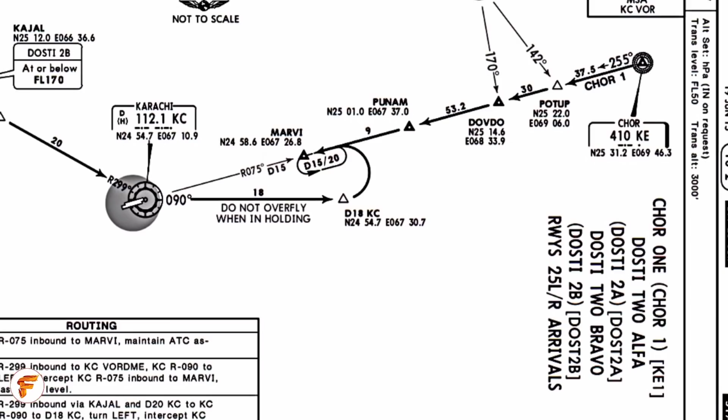This is me, Captain Fahad, and I'm back with the ever awaited series of preliminary report of PK-8303 Part 2.

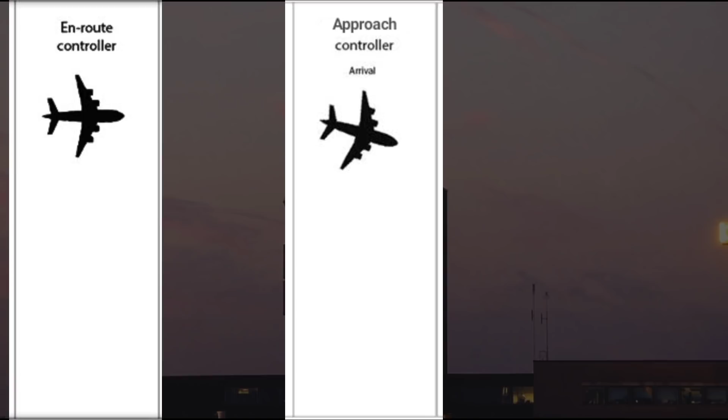Okay, guys, first of all, let me give you a slight insight about ATC controllers. There are three main types of ATC controllers. One is en route or the area controller, second is the approach controller, and the third is a tower or aerodrome controller. So, as the airplane approaches and flies through a center's airspace, an en route controller guides the plane along its route by using radar and computer technology.

They can track the exact position of each aircraft flying in that airspace and adjust the flight path of aircraft to avoid collisions and for safety in general. And once the aircraft reaches the vertical limit of the jurisdiction of approach, it is then handed over to the next control unit, that is an approach controller.

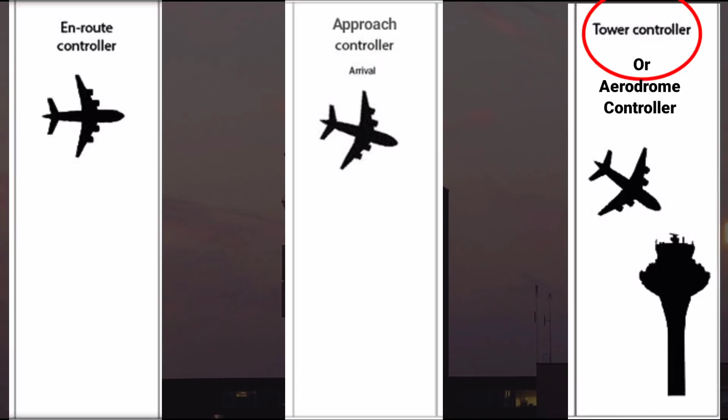Approach controller will further descend the aircraft, and at the same time it will guide the aircraft to align with the runway center line. They are responsible for when and where each aircraft should be, ensuring that the minimum separation is maintained between aircraft coming for an approach. Once the aircraft has descended sufficiently and is aligned with the runway center line, its control is then passed to the destination aerodrome tower controller, which then clears the aircraft for landing if the runway is clear.

One thing more on this is that aerodrome controllers are located at the highest place where the view of the runway and aircraft coming to land is visible to them. So as the aircraft lands, they can see them vacating the runway and then clearing other aircraft to land.

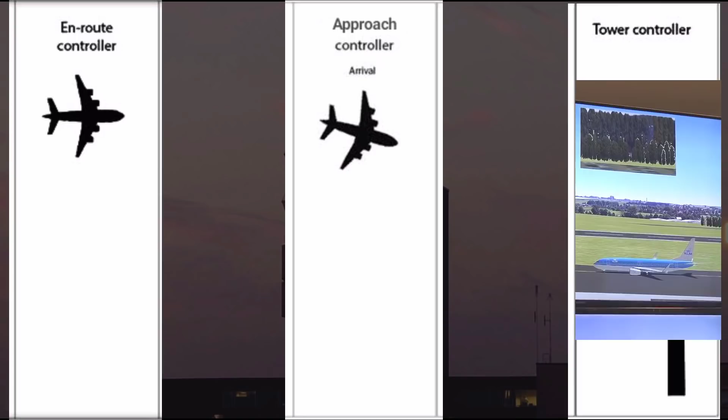So guys, just to summarize, area controller helps the pilot in their cruise phase and maintains the separation between aircrafts in cruise. The approach controller duty is to line up the aircraft with the runway for an approach and maintain the distance between the aircrafts, and mostly he is looking at his radar. The aerodrome controller duty is to clear the aircraft to land on the runway which it is aligned for, and aerodrome controller is the one who is mostly visual and also looking for any abnormalities when an aircraft is coming in for a landing. For example, like if the landing gears are out or the runway is clear.

Okay guys, so at this point I hope it has now been cleared about the duties of air traffic controllers. Let's look at what the report depicts. So when the flight PK-8303 was coming in for a landing, instead of switching it over to aerodrome controller, the aircraft stayed with the approach controller. The aerodrome controller passed the landing clearance to approach controller via telephonic conversation without even looking at the aircraft, that their landing gears were not extended.

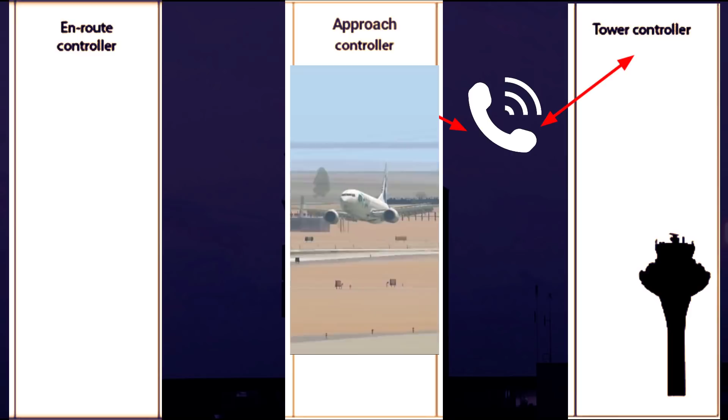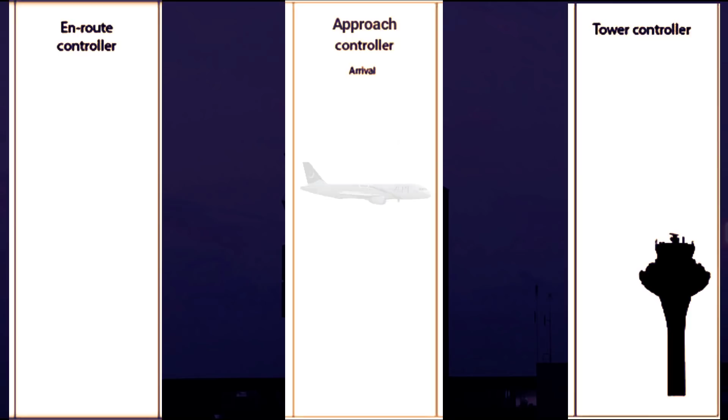Hence, the Karachi approach controller cleared the aircraft for landing, whereas the clearance should have been given by the aerodrome controller. But I believe that the approach controller didn't tell the pilots to change the frequency to aerodrome controller just because the aircraft was very near to the runway and there wasn't enough time to hand off to aerodrome controller, so the approach controller took the clearance permission from aerodrome controller via telephonic communication and then instantly conveyed that to the pilots that they are clear to land.

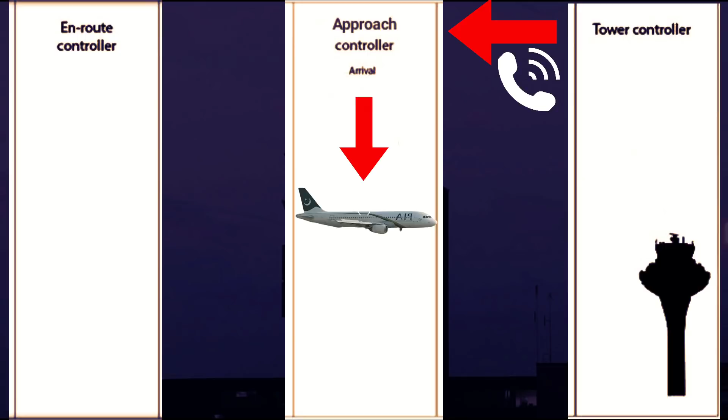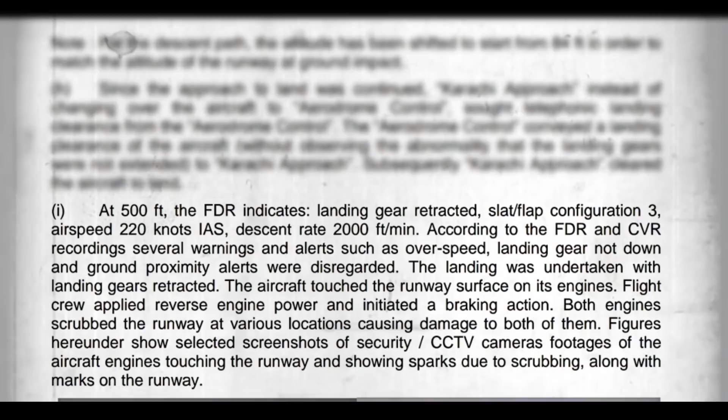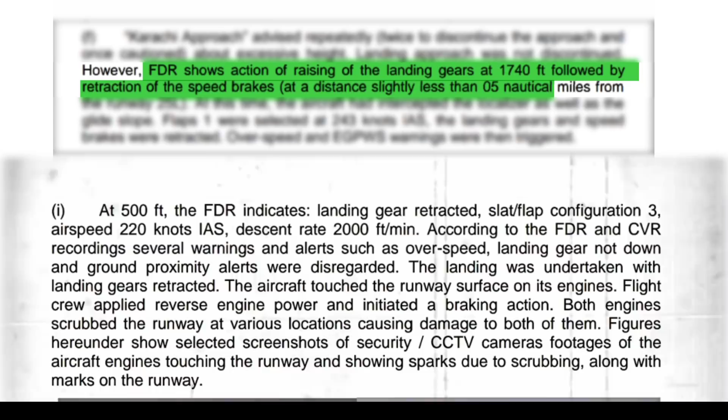So as point H is cleared now, moving on towards point I. So bear with me on this because there is a lot going on here to grasp. I'll continue to explain as I go with the point. So the aircraft is down to 500 feet and cleared to land by the approach controller. The FDR indicates that the landing gear retracted. So as we know from point F, the landing gears and the speed brakes were retracted by pilots at around 1740 feet, and we have no clue why.

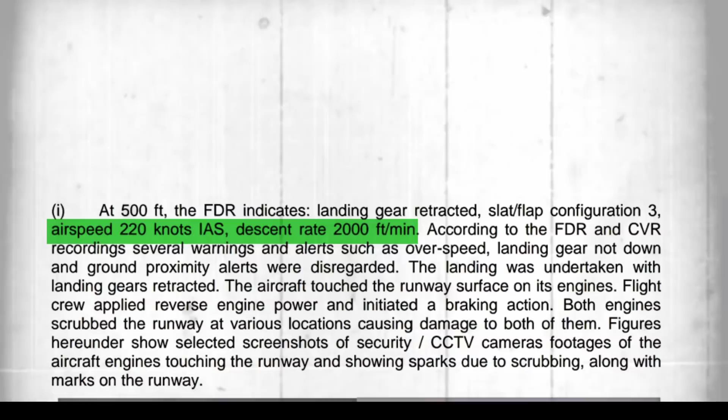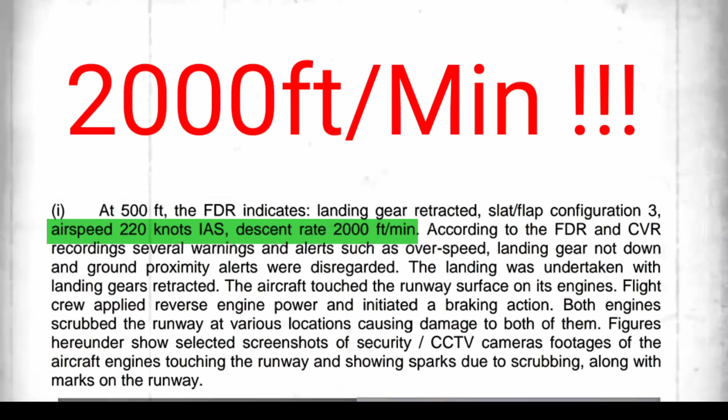So flaps and slat configuration 3, airspeed 220 knots indicated, descent rate, my goodness, 2000 feet per minute. Well, don't have words. Well, the aircraft speed was way too high. So the VSI speed, which is the rate of descent, is 2000 feet per minute, while it should have been half of this or even less. They were way too fast at 500 feet.

Honestly, it would have been a very uncomfortable descent for passengers and a roller coaster ride for pilots, considering the fact they were flying a jetliner rather than a fighter jet.

Okay, so moving on further, according to the FDR and CVR recordings, several warnings and alerts such as overspeed, landing gear not down, which is too low gear, and ground proximity alerts were disregarded. The landing was undertaken with landing gears retracted. The aircraft touched the runway surface on its engines.

My goodness. Flight crew applied reverse engine power and initiated braking actions. Oh my god. Okay. Both engines scrubbed the runway at various locations, causing damage to both of them, which is obvious. Okay, so despite all the warnings, bells, whistles, chimes, aircraft telling too low gear at 1750 feet, the gears were still retracted. And even at 500 feet, the action of lowering the gear was not taken. And despite all the warnings, the aircraft touched the runway on its engines.

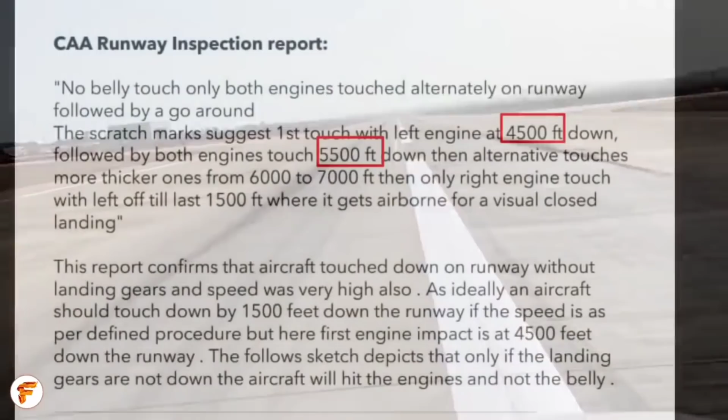So, after that, both engines scrubbed the runway at various locations, and the locations are mentioned in the CAA inspection report, one at 4,500 feet, another at 5,500 feet, and the thicker ones at 6,000 to 7,000 feet down the runway. Selected screenshots of CCTV camera footage show the horrific scene of the aircraft touching down, and visible sparks are coming off due to the aircraft scrubbing. What a scene that would be for passengers.

Okay guys, let's swiftly move on to the next part. The aerodrome control observed the scrubbing of engines with the runway but did not convey this abnormality to the aircraft. It was conveyed to the Karachi approach on telephone. Subsequently, Karachi approach also did not relay this abnormality to the aircraft.

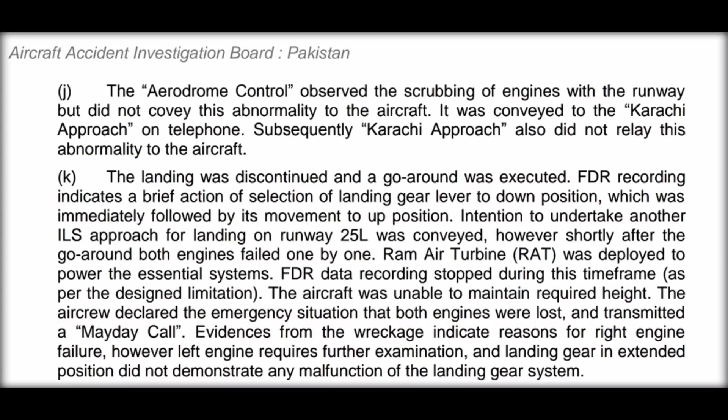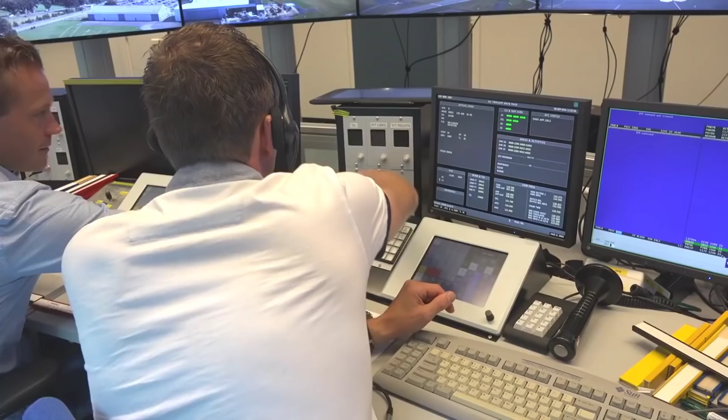Okay, so at this point, the aerodrome controller, who I told you earlier sits where the aircraft are visible to them, saw the aircraft scrubbing down the runway and conveyed this message to the approach controller via telephone. This confirms that the approach controller and the aerodrome controller were sitting at different locations or might be far apart from each other.

The key point here is that the approach controller also failed to convey this message to the pilots and failed to ask what their reason was to go around, why they executed a belly landing, how many souls were on board, but nothing was asked. So at this point, the ATC controllers were well aware of the situation and what was going on.

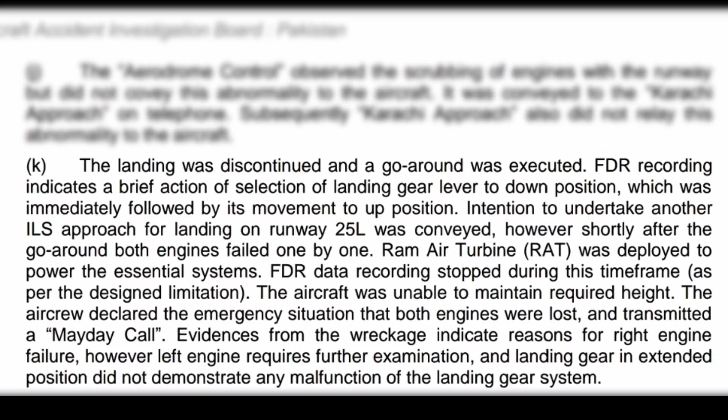Okay, so point K indicates the landing was discontinued and a go around was executed. FDR recording indicates a brief action of selecting the landing gear lever to the down position, which was immediately followed by its movement to the up position. So yeah, definitely they must have realized that they landed the aircraft without landing gear.

So at this point, I believe that the first officer immediately lowered the landing gear lever, but the captain ordered, or the first officer himself realized, that the aircraft was scrubbing on the ground and the gears could not be lowered. So the first officer must have pulled the lever to the up position again. And this is what I think so far. Intentions to undertake another ILS approach for landing on runway 25 left were conveyed.

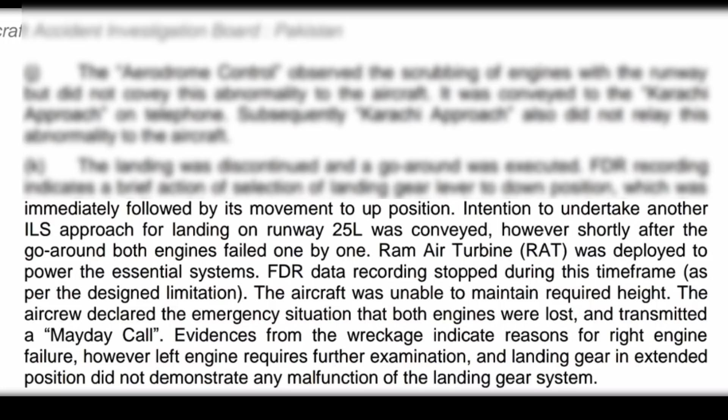However, shortly after the go around, both engines failed one by one. Ram air turbine (RAT) was deployed to power the essential systems. FDR data recording stopped during this time frame as per the design limitation.

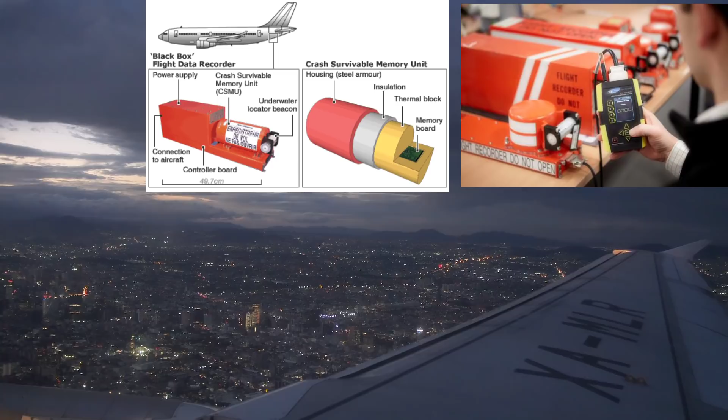Okay, so again, I don't know why Airbus have put this design limitation on the FDR to go off once the engine's electrical power cuts off, as I think they should keep on recording the data even if the engine power goes off. But now from this point there is no official data as the FDR stopped recording.

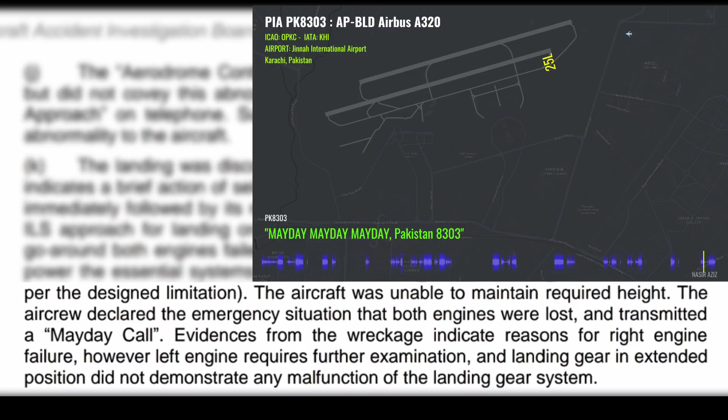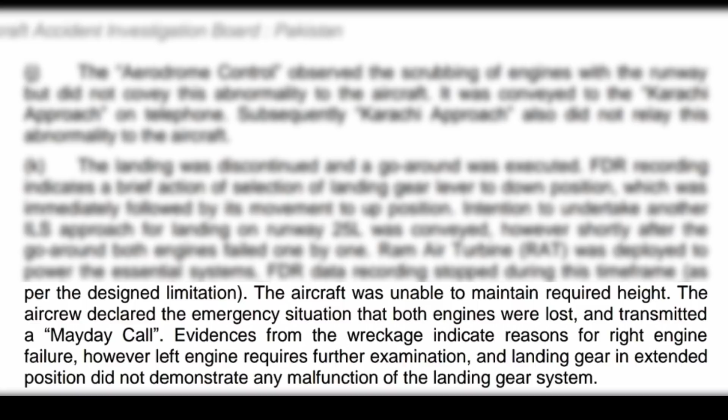The aircraft was unable to maintain required height. The aircrew declared the emergency situation that both engines were lost and transmitted a mayday call. Evidence from the wreckage indicates reasons for the right engine failure, which is again by scrubbing onto the runway, the right engine failed. However, the left engine requires further examination, and landing gear in extended position did not demonstrate any malfunction of the landing gear system.

Sadly, the aircraft crashed about 1,340 meters short from runway 25 left. It was a slow speed impact with high angle of attack, with aircraft configuration indicating landing gears extended, slats at step position 1, and flaps retracted. The said configuration was ascertained and documented from the wreckage at the crash site, as the FDR data recording had stopped earlier. As I told you before, at this point there is no official data as the FDR stopped recording.

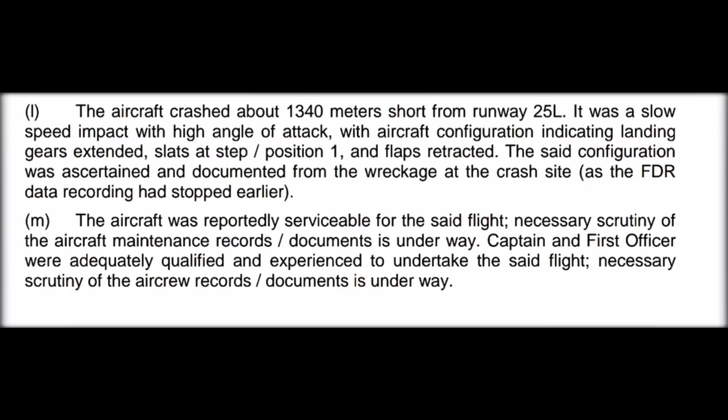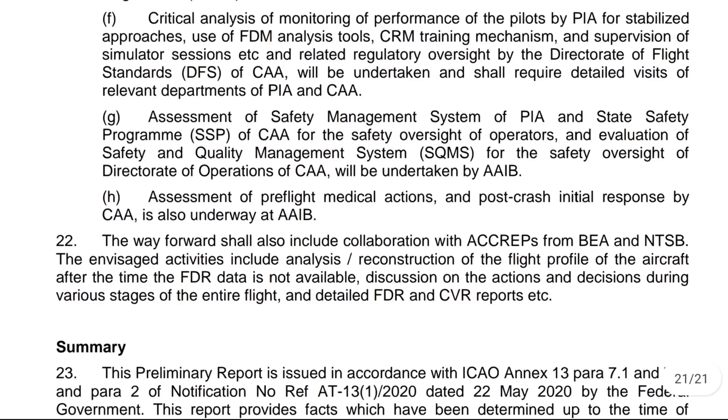So, seriously, guys, there's nothing important in this report now, honestly. If I continue, it will be a waste of time as there is nothing important ahead. The way forward is just brief info regarding what is the next step, how they will analyze further with their investigation, and so on. I will be just dragging on this and the length of the video will be increased.

So let's come down to the summary and my thoughts, and let's look at the options the pilots had to save the aircraft. There were a lot of options that had been overlooked by pilots, the most important and obvious one was to take an orbit while the ATC controller was instructing them, but it was refused. Second, if the ATC controller had ordered them to go around at the last moment, then it could have been saved. These were the initial options that would have definitely saved the aircraft before the accident could occur, as prevention is better than cure.

But let's see now what could have been done after the aircraft struck on its engines. As the aircraft struck and lifted off, according to the report, the aircraft's engines started to fail one by one, obviously due to scrubbing and taking the full force of the impact. And once they lifted back up, they couldn't climb further to 3,000 feet, as it's not possible for an aircraft to climb to that altitude without engine power. So they were instructed to turn left heading 110.

At this point, the pilots had two options. Knowing the severity, that engines have less or no power and it will not be able to glide all the way back to runway 25 left, he could have landed the aircraft on the same runway from which they had departed, on the reciprocal runway 07 right. Yes, he could have done that easily by giving the ATC controller a mayday call and informing ATC that they are landing back on runway 07 right, as they had lost engine power and would not be able to make it back to runway 25 left. So, this option was also not initiated.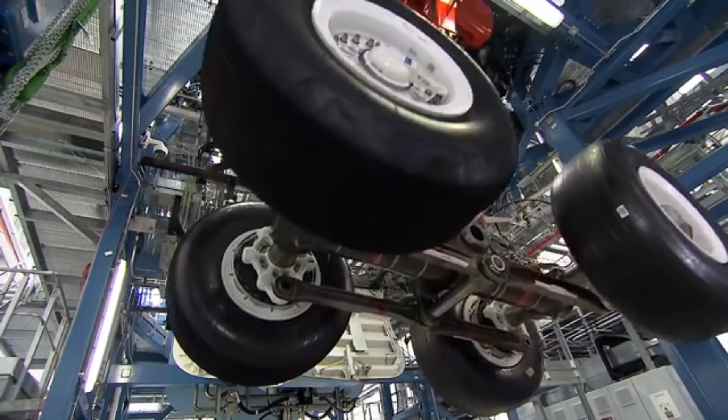So, what's next, you may ask? Wasn't there any hope for survival, right? Well, there was one. Yes, one last, in layman's terms, 50-50 survival chance, and that was to carry out a landing without the landing gears at the last moment, or to even lower the landing gear while they were very near to the runway.

That would also be a good option, but not a preferable one. Let me take a little bit of your time to explain what happens when landing gears extend. When the landing gears are out, the parasite drag increases enormously.

At sea level, the drag on the aircraft is significantly higher than the drag at high altitudes where an aircraft usually cruises. This is why an aircraft flies at higher altitude to save fuel and fly faster with very minimal drag that opposes the aircraft, saving time, fuel, and keeping the ride comfortable for passengers due to weather being stable at such altitudes. When an aircraft comes to a lower altitude, the drag starts to increase and you need more engine power to counter that drag.

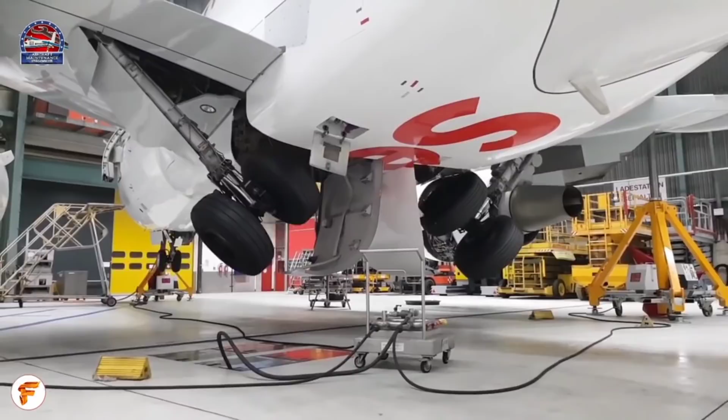When an A320 is flying with its engines on idle, the air mode of Airbus is always producing some thrust when on idle. Hence, at idle thrust and landing gear retracted, the Airbus has a glide ratio of 3 to 1, meaning 3 miles forward in distance while losing 1000 feet of altitude. When engines are flamed out, the engines themselves are now an additional weight and they are also producing more drag. Hence, with both engines shut down and landing gears retracted, the glide ratio comes down to 2.5 to 1.

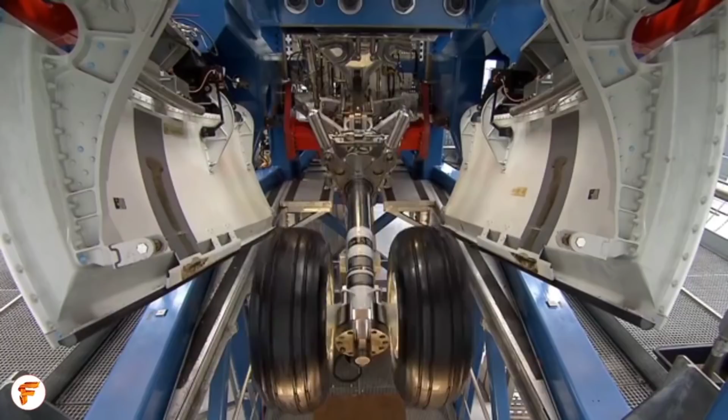And once the landing gears are extended while the engines are flamed out, the glide ratio comes down to 1.8 or 2 miles to 1, meaning 1.8 miles of forward distance for every 1000 feet. So the landing gears are made to bear the load of the aircraft. They are huge in size and they aren't very aerodynamic. Hence, once lowered, they produce a huge amount of drag that in turn reduces the airspeed of an aircraft. To counter that, engine power is required.

If you don't have engine power available, then you must have enough altitude to convert that potential energy into kinetic energy, and hence we trade speed with altitude. If you don't have altitude, then the last option to keep the aircraft aloft is angle of attack. That also increases drag once increased. They all require thrust. The drag exerted on the aircraft at mean sea level, the angle of attack, the landing gear generated drag. To counter that, it requires thrust.

Hence, flight PK-8303 had no engine thrust, had no altitude, and the last mistake the captain or the first officer made was to lower the landing gear. That in turn increased the drag, and in the hope to save the aircraft, they tried to increase the angle of attack of the aircraft, which further stalled the aircraft and the aircraft crashed.

Maybe, just maybe, if they had not extended the landing gears, the aircraft would have barely made it to the runway. If not, then it would have crashed somewhere short of runway 25 left, and that would have saved some lives, if not many, as the aircraft would be near the runway and the airport emergency services would have been easily accessible upon impact.

The disaster of flight PK-8303 could have easily been avoided if the orbit was taken initially, and even after the failed landing attempt, the pilots had enough options to save the aircraft. If the aircraft had traveled such distance and crashed only about 1,340 meters short, then it could have been landed on the reciprocal runway of 07 right or at PAF base. This is what I think, and this is what the pilots had. If any one of the given options had been selected, perhaps the lives on flight PK-8303 could have been saved.

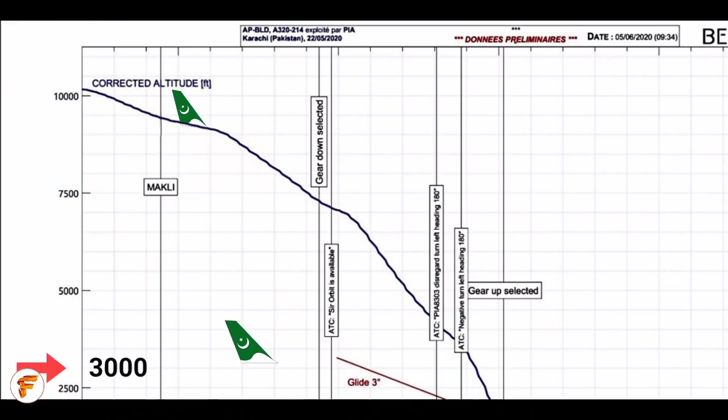At this point, the report is concluded, and I have nothing more to say except to say sorry to the families of the deceased of flight PK-8303. I made this video for the general public who do not belong to an aviation background, and I tried my best to educate you on the matter of aviation and also on the various aspects of aerodynamics and aircraft while going on with the report. Yes, the video was detailed, but it took me a lot of time to make, as good things take time, and I believe in quality over quantity. So I hope you learned a lot.